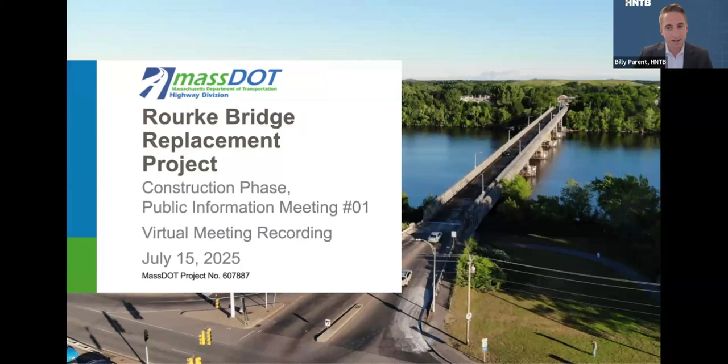So we'll jump right into the agenda. I will be introducing the project team and speaking about the design build project delivery method. Peter Tramontozzi with MassDOT will be providing the project background. Kristen Whitman with Jacobs Engineering, the lead designer on the design build team, will be covering the project design. Andrew Pramberger with Skanska, the firm primarily responsible for construction, will be covering the construction and schedule. Then I will come back to close out with an overview of our public involvement plan and how to stay connected with the project.

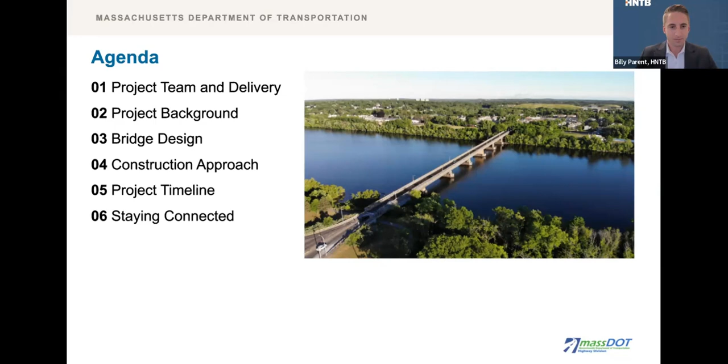To continue with the specific entities and team members, the project was developed and is owned and administered by MassDOT. Mustafa Sadeq is the major projects design build project manager. Peter Tramontozzi, Joseph Stasio, and Daniel Boland help manage project administration, engineering, and construction for MassDOT Highway District 4, which consists of communities within northeastern Massachusetts, including portions of Essex, Middlesex, and Suffolk counties.

For HNTB, as the preliminary designer that developed the base technical concept for the project, Alex Murray is the preliminary design project manager. Graham Gaspar serves as our senior engineer, and Patrick Marvin and myself will be supporting public involvement.

For the design builder, Robert Pine is the vice president of operations, and Andrew Pramberger is the construction project manager, both for Skanska, and Kristen Whitman is the design project manager for Jacobs. Skanska and Jacobs are responsible for finalizing the design to meet the base technical concept and for performing the construction. Jacobs serves as the designer and Skanska oversees and performs construction.

The design builder also has public involvement support, which consists of Regina Villa and Associates, including Regan Checchio, Emily Meyer, Kyle Olsen, and Liam Kearney, to also support public involvement. Finally, I'd also like to mention that the primary municipal coordination for any municipal facilities and utilities will be with the City of Lowell.

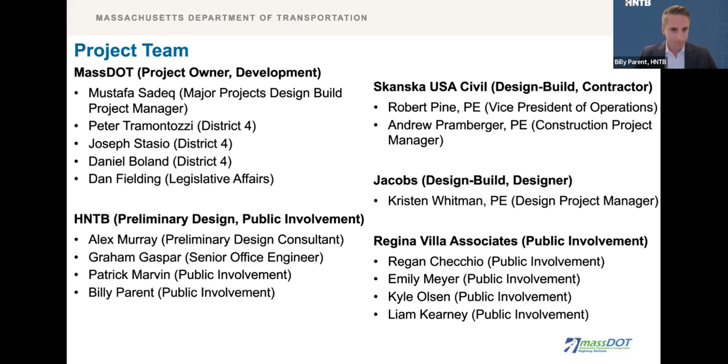Before I turn it over to Peter Tramontozzi with MassDOT, I'll cover a few points about the project delivery. Preliminary bridge design and environmental permitting were completed in the 2023-2024 timeframe.

Additionally, there was a robust public involvement process during the preliminary design phase, which included forming a stakeholder advisory committee and holding multiple public meetings and a design public hearing for design development, all of which took place from 2020 to 2024. At that point, MassDOT advanced the preliminary design and issued a request for proposals for the project to be fully designed and constructed, and Skanska Jacobs was then awarded a competitive best value contract in May of 2025.

This project will be completed using the design build project delivery method, where a single team manages both the final design and construction. This approach combines final design and construction into one phase, eliminating the need for a separate construction bid based on finalized plans and specifications. By streamlining the process, design build can reduce project timelines and foster greater collaboration amongst the project team.

The benefits tend to include that it promotes innovation, reduces the owner's project risk, and expedites project delivery. This delivery method also enables the contractor to begin early construction on some items while final design is still underway.

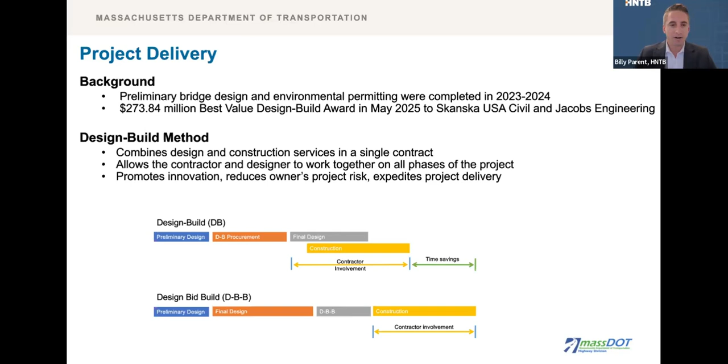So with that, I will turn it over to Peter Tramontozzi with MassDOT to get into the details of the project background. Thank you, Billy, I appreciate it. My name is Peter Tramontozzi. I work out of the District 4 office. The project background, as everyone is aware, is the Rourke Bridge in Lowell.

Many of you are aware this bridge was built in 1983 and was opened to traffic in 1985. It provides a vital connection across the Merrimack River, as there are about 27,000 vehicles per day that use this crossing. As shown on the graphic, the UMass Boathouse is directly downstream of the bridge, and there are many soccer fields, the Esplanade, the parks, and the charter school all within walking distance of the bridge.

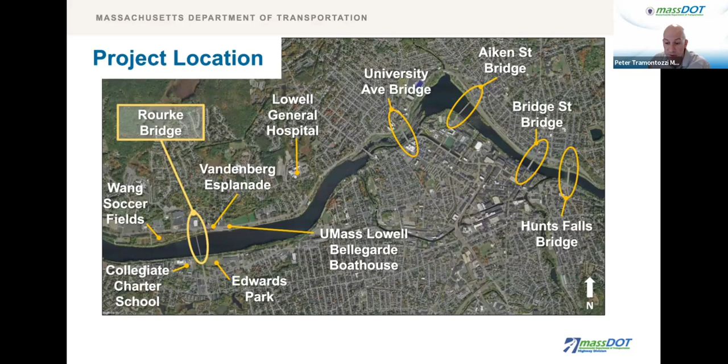Next slide, please. The existing conditions, as I had mentioned, the bridge has been in place since 1985, and while it is safe and inspected regularly, it is towards the end of its useful life.

It does not meet current MassDOT standards, as there are no shoulders or bike lanes, and it can only accommodate one travel lane in each direction. As you can see from the photo, the sidewalk is also outdated and is in much need of an upgrade.

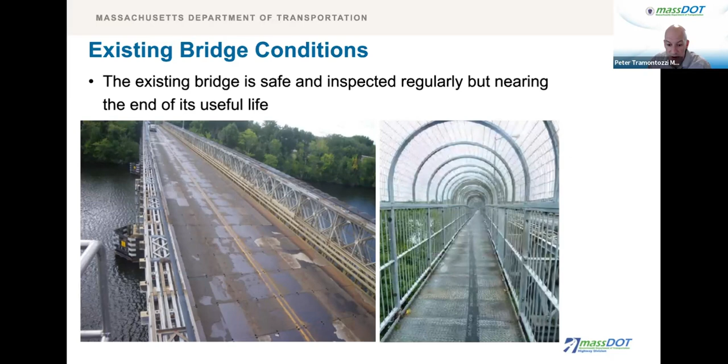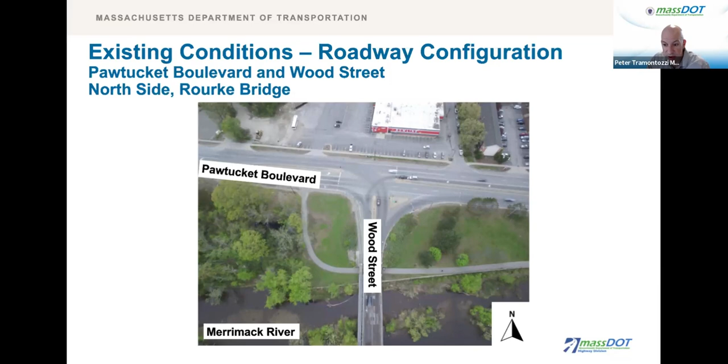Next slide, please. Along the north side of the project, this shows the configuration along Pawtucket Boulevard. As you can see with this slide, there's also inadequate approach capacity on the north side, and there's only one left turning lane from Pawtucket Boulevard westbound onto the bridge. The traffic signal equipment is also outdated and in need of an upgrade. Next slide, please.

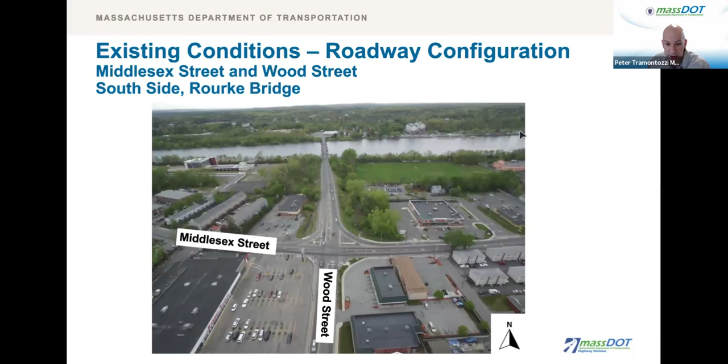When our project team was developing the base technical concept, they needed to make considerations for all the users within the area. This area is not only used by vehicles traveling over the bridge, but pedestrians, bicycles along the waterfront, and rowing within the Merrimack River.

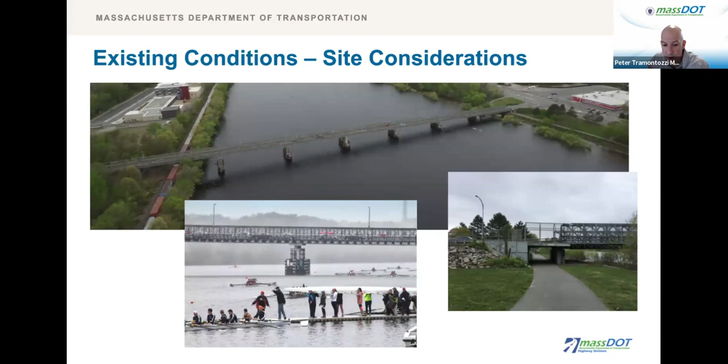The project purpose: with this project, we're going to be replacing the bridge. We're going to be enhancing safety and connectivity for pedestrians, bicycles, emergency vehicles, and watercraft. And we're going to improve traffic operations at the Wood Street intersection with Pawtucket Boulevard, Middlesex Street, and Princeton Street.

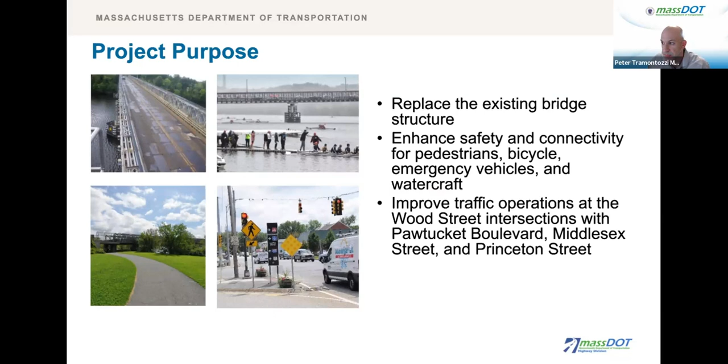So what does that entail? The scope of work for our project is we'll have a new relocated Rourke Bridge, slightly to the west, across the Merrimack River. This includes new abutments, new in-water bridge piers, and significant roadway improvements on the approaches.

We will also have utility and roadway reconstruction along Pawtucket Boulevard and Middlesex Street. There's going to be significant landscaping and hardscape improvements. Then at the end of the project, once the new bridge is open to traffic, we're going to demolish the existing temporary bridge and remove the 1985 structure.

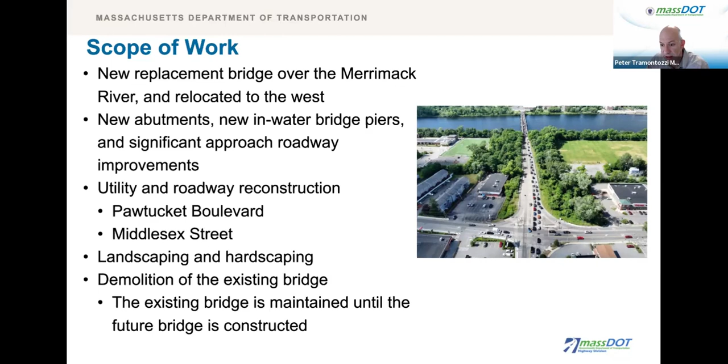This graphic shows the overall general scope of the project. As you can see, the bridge is built slightly to the west, and we have a legend at the bottom of the screen which shows the significant improvements that will be done on this project, which include the roadway reconstruction, the new landscaping that'll be done, the installation of shared use paths and bike lanes on both sides of the bridge and the river, and significant sidewalk and hardscape improvements as well.

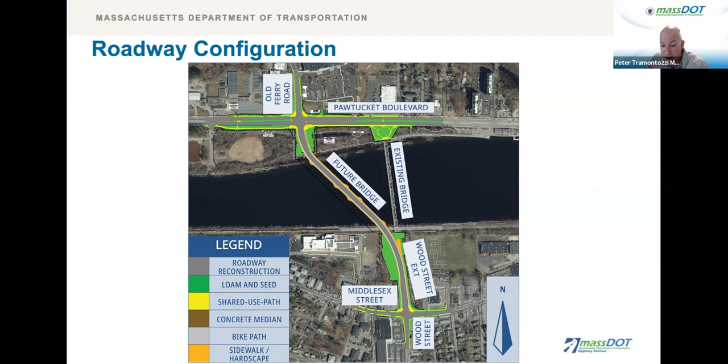And with that, I'll turn it over to our lead designer, Kristen Whitman, who can discuss some of the elements that are highlighted on this screen.

Thanks, Peter. So starting off with the bridge design, this slide shows a cross-section of the new bridge.

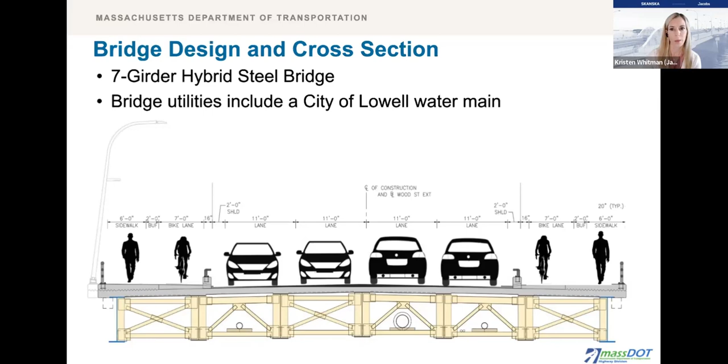It will be 84 feet wide, which is much wider than the existing bridge, with 2 traffic lanes in each direction and sidewalks and bike lanes on each side. The bridge superstructure will be made up of 7 hybrid steel girders and a concrete deck. Utilities carried along the underside include a water main, drainage pipes, and fiber optic conduits.

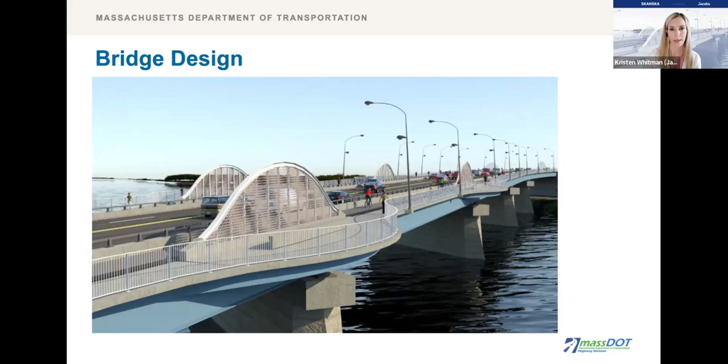The bridge piers will be concrete wall piers with a full height granite facing from the base up to a concrete pier cap. This will provide a clean and simple look at all 6 piers, even though they vary in height from shorter piers at the north end to the taller piers at the south end. The full height granite walls are also consistent with other bridges along the Merrimack River.

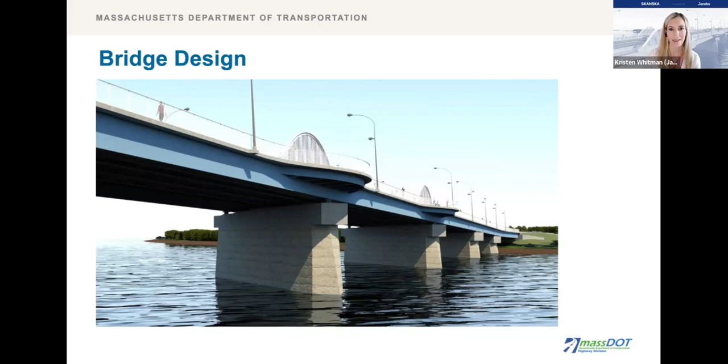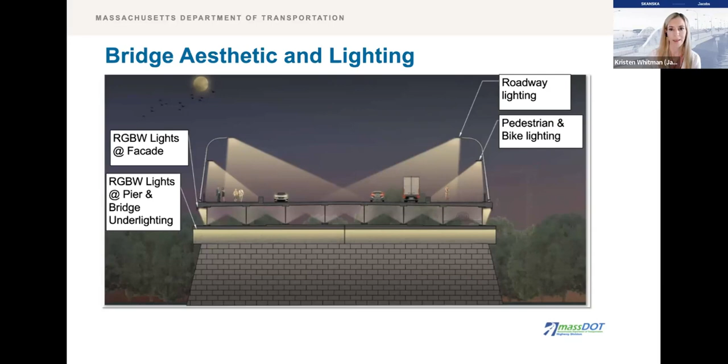Here's a nighttime view showing the roadway lighting, pedestrian and bike lighting, and the aesthetic lighting along the facade, piers, and the underside of the bridge. And on the next slide is an elevation view of the bridge at night, showing the lighting along the trellises and how the trellis layout is inspired by waves.

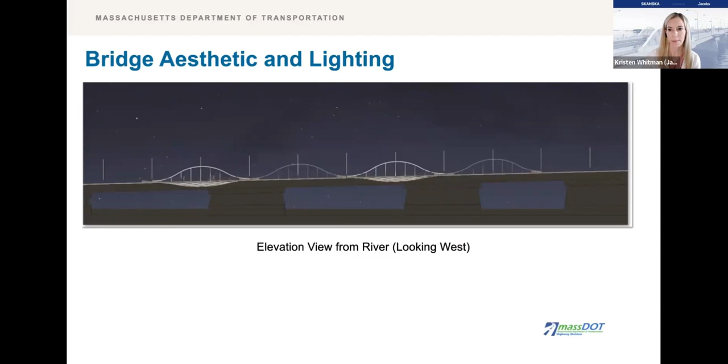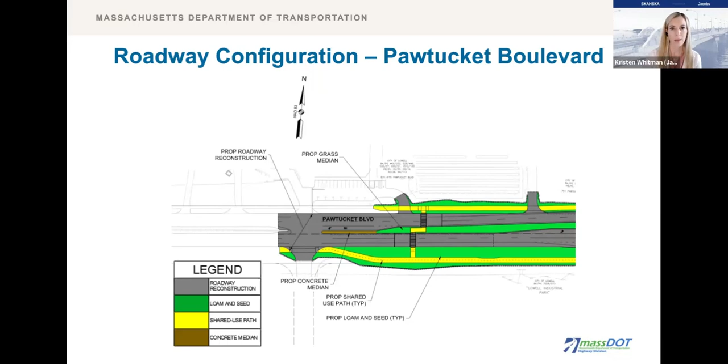Next slide. So here we have a few slides showing the work along the roadways in the project area. This is Pawtucket Boulevard near the west end of the project. We have roadway reconstruction shown in gray, the proposed shared use path in yellow, green for the grass areas, and a new section of concrete median in brown.

Next slide. At the north end of the bridge, the new bridge alignment on Wood Street Extension comes into the intersection of Pawtucket Boulevard and Old Ferry Road. This intersection will be reconstructed for vehicles, bicycles, and pedestrians, with new traffic signals, hardscape areas, and drainage basins.

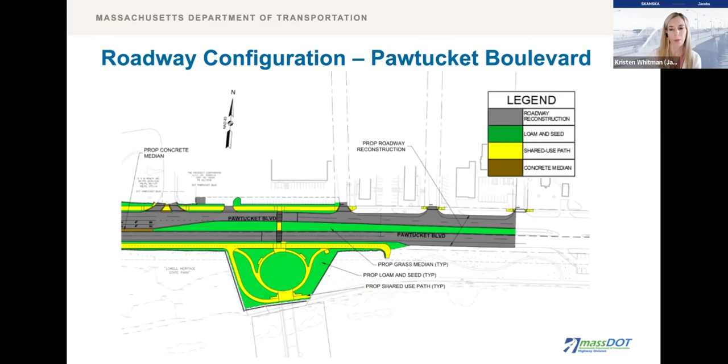Next slide. So where the existing bridge currently intersects with Pawtucket Boulevard, the bridge will be demolished, and that whole area will be converted into an overlook park area with a shared use path, benches, and landscaping. And at the south end of the new bridge, Wood Street Extension will intersect with Middlesex Street.

This intersection will be reconstructed with new traffic signals to accommodate the bicycle and pedestrian movements through the intersection and along the shared use path.

Now I'll pass it over to Andrew to present the construction approach.

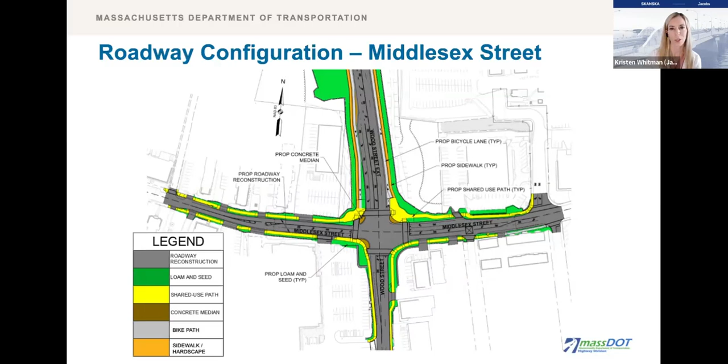Thank you, Kristen. The construction approach relies on maintaining access throughout construction for existing vehicular and pedestrian traffic, to allow local business access and driveways along the corridor.

The new bridge will be constructed offline of the current bridge so that we can then tie the new bridge in and remove the existing bridge in one phase.

Most of the work will occur during daytime hours, though some work will be required at night for utility work or lane closures, so as to minimize traffic disruptions on the local streets.

In terms of construction mitigation, we will have traffic management plans in place to minimize impacts to roadway users and identify the best routes for truck traffic to go when accessing the construction site.

The abutters and the community will be kept informed throughout construction through regular updates from Mass DOT, and major operations will be within confined work zones to separate active construction from the public.

We want to minimize construction vehicles on local streets by using dedicated haul routes and minimizing truck traffic, and schedules will be coordinated with the rowing community as well to minimize impacts to the waterway on the Merrimack River.

Noise and dust control mitigation will include noise monitoring and dust monitoring in process, and we'll utilize water spray to mitigate dust. Work will also be scheduled based on weather and events to minimize overall impact.

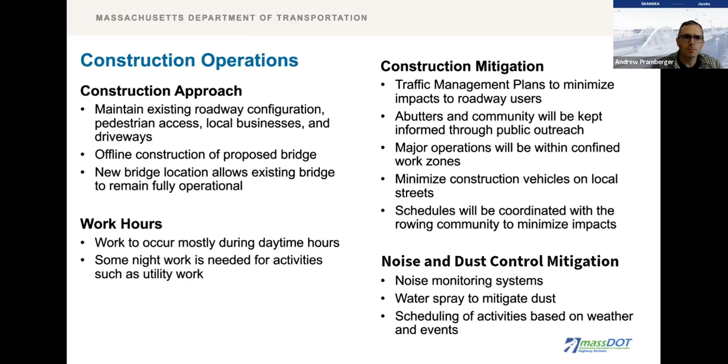In regards to the project schedule, there's an 18-month design phase that is well underway.

Jacobs, working with us, is proceeding with the final design as we start with some early enabling activities. We have investigatory work underway right now to support the design, consisting of geotechnical borings and field investigation that will last through the summer. Starting in August and September of 2025, initial tree and vegetation clearing will begin so that we can set up the work zones.

That will be followed by construction of a temporary access trestle running through fall 2025, followed by the permanent new bridge construction. Full beneficial use of the future Rourke Bridge is anticipated in 2029, and final completion of the project is in 2030.

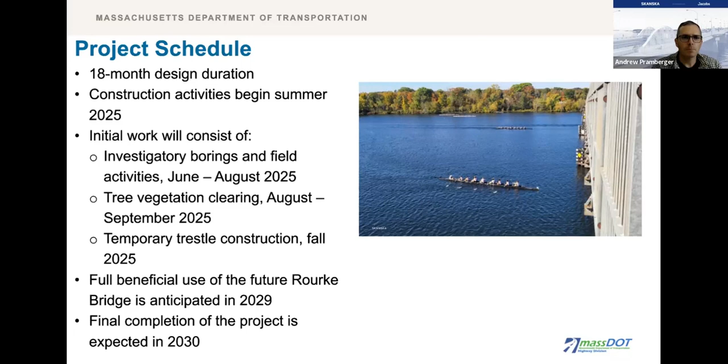Now, to walk through how the bridge will be built, we have a series of 3D renderings. All of these renderings are looking from the north side of the project, looking south. In the bottom right-hand corner you have Pawtucket Boulevard, and on the top left is the existing intersection of Wood Street and Middlesex Street.

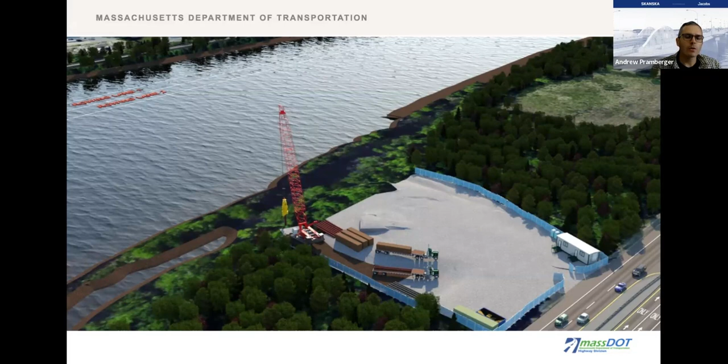Most of the work will be accessed from the north side of the project off of Pawtucket Boulevard. There's an existing area where the new north approach will be, that our construction access yard will be working from. The first step is land clearing, followed by access so we can get out on the water to build the new structure. That requires us to build a temporary access trestle, or a small work platform, extending out into the Merrimack River.

You can see here the trestle construction will proceed from the north abutment work zone, working south on a diagonal basis following the new alignment of the Rourke Bridge. We'll have a crane working its way out to set the new access trestle.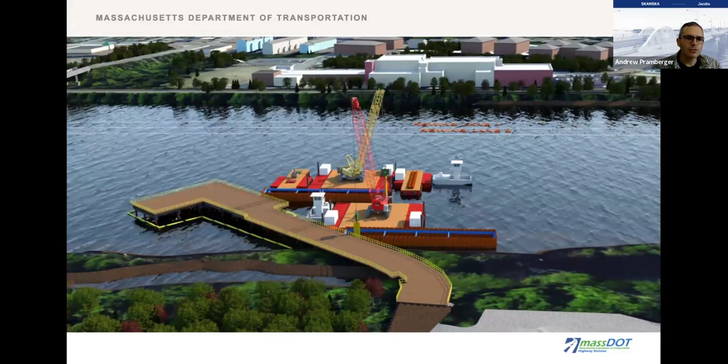Once that access trestle has been installed, that will be our primary access to get machines, equipment, and craft onto the water. So we will not be using the local DCR access ramp further down at the Rourke Brothers boat ramp.

Construction operations start working from the north side to the south at the six bridge pier locations. This consists of driving sheeted cofferdams to create dry work areas to build the bridge piers, followed by the drilled shafts that support the bridge foundations, working our way to the south. In this rendering, you can see a drilled shaft being installed at the closest pier to the north abutment, Pier 6, while the sheeting is being installed at Pier 5, just downriver from that.

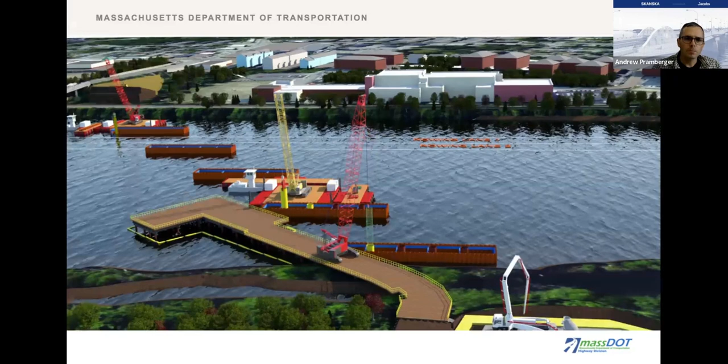So in total, there are six sheeted cofferdams going into the river, all of which will be advanced working from the north to the south.

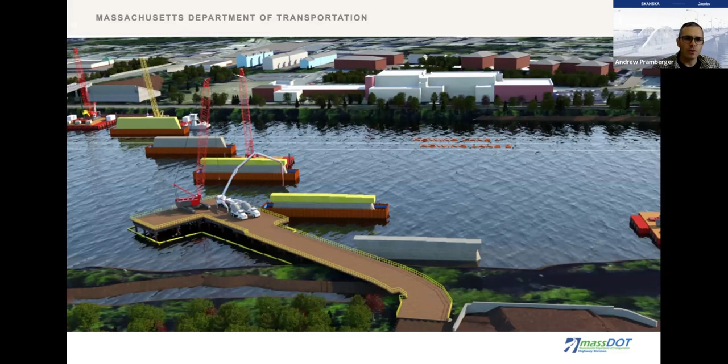Once the sheeted cofferdams are in place and the drilled shafts have been installed, the next step is to install the concrete foundations and piers that support the bridge. These will be installed, again working from the north to the south, with the site accessed from the temporary trestle, as well as barges working on the water.

So we mentioned access for the rowing community. At all times, 2 rowing lanes will be maintained and marked through the Merrimack River for recreational access. We also know that up to 6 rowing lanes and 1 return lane will be required for one of the many regattas that go across the river. In this case, construction operations are designed so barges and equipment can be pulled to the north side as shown here, and the temporary trestle only extends far enough to maintain those 6 lanes plus the return lane. We'll coordinate closely with all rowing activities to ensure those events continue to occur.

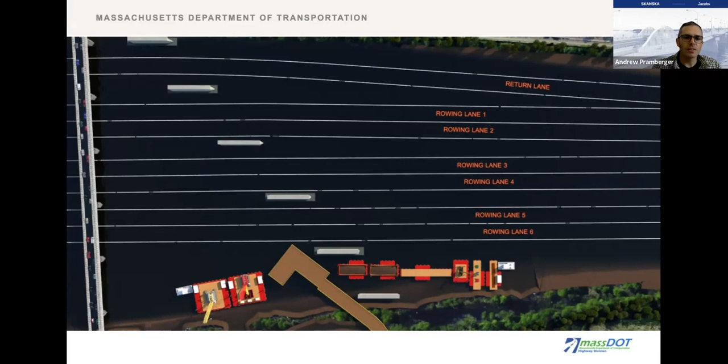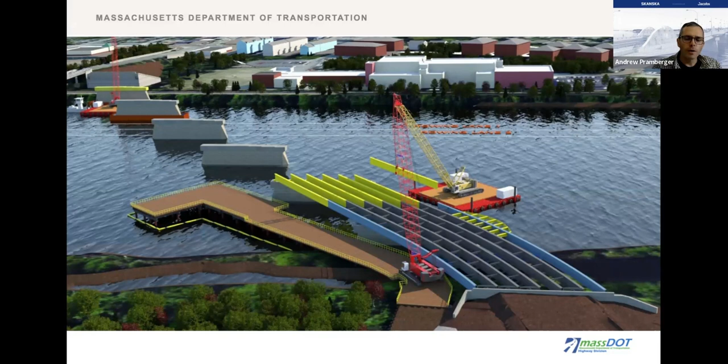Next slide. Once all of the concrete piers have been installed, bridge steel erection will begin, working our way from the north side moving south. Steel girders will be set into place using a series of cranes working down. The next step will be placing the concrete bridge deck. Here you see all of the bridge steel installed, tying into the south abutment.

Followed by the concrete bridge deck being poured out from the north to the south. Once the bridge deck has been poured, we will open the new structure with 1 lane in each direction.

And that allows us to then take out on the south side, where the existing Rourke Bridge is, to build the full width bridge. Here you see the full 4 lanes of traffic in service, along with the new bikeways and pedestrian walkways. Once that full structure is constructed, we will proceed with demolition of the existing Rourke Bridge.

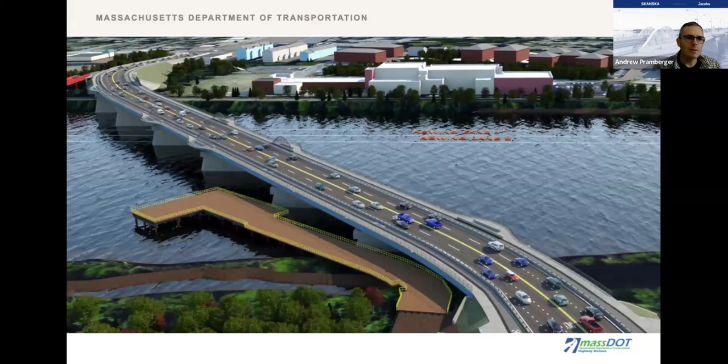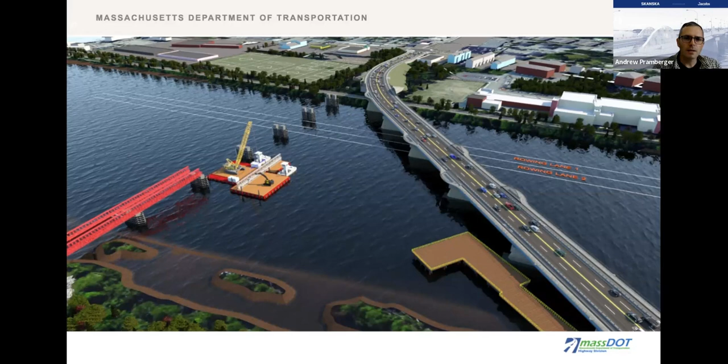As you see here, that work will take place from the south, working north, taking the bridge apart span by span, lifting the structure onto barges, dismantling it, and bringing it to the north to be shipped off site. So that's the full construction sequence, bringing us to the full beneficial use in 2029.

So I'll turn it back over to Billy now to talk about public involvement and keeping everyone informed.

Thanks, Andrew. Public involvement and minimizing impacts during construction are top priorities for the project team. I'll now go over our approach to public involvement, abutter coordination, and review the different methods by which the public can stay connected and informed as the project moves forward. At the outset of the project, we developed a public involvement plan outlining our activities to keep stakeholders updated. We've carried over a list of approximately 1,400 stakeholders from the design phase, which will be a growing list to ensure a comprehensive group of contacts for the various individuals and organizations involved with the project.

We will also be developing a schedule for public meetings, which we expect to host biannually or as needed as the project progresses. Our first public meeting for the construction phase was Tuesday, July 15th, at Collegiate Charter School of Lowell.

Additionally, our plan outlines how we coordinate and notify elected officials through legislative briefings, individual and targeted outreach to abutters and community stakeholders, media and social media engagement, notifications to first responders, and coordination needed with adjacent projects to minimize impacts and coordinate with the Lowell Regional Transit Authority during construction.

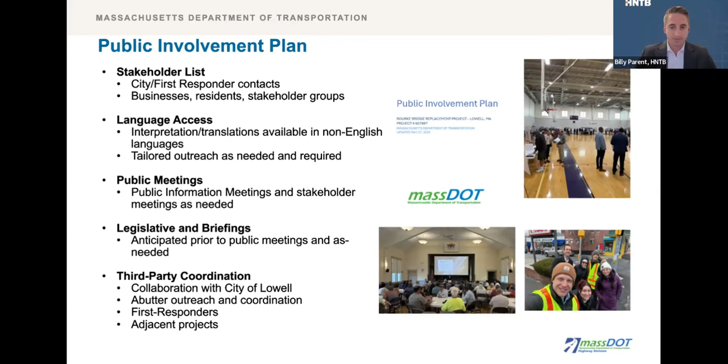Next slide, please. For project communications, there will be multiple ways for the public to reach the project team to provide comments, feedback, or report complaints or issues. The design builder will be establishing a project hotline phone number that reaches the project team directly; this number will be announced shortly after the public meeting.

We also have a live project comment form where anyone can provide feedback that we will monitor and respond to, and a dedicated project email, massdot.rourkebridgeproject@dot.state.ma.us, as an additional method for the public to get in touch with us.

Finally, we are maintaining the existing project website, where we'll provide traffic and construction advisory information, as well as project schedule and milestone updates and materials for public meeting presentations and recordings. We'll also send regular stakeholder email updates and develop flyers for project activities, meetings, and milestones, translated on an as-needed basis, and work with MassDOT Communications on media advisories and social media updates.

So finally, we'd like to thank the Lowell Sun for publishing the public meeting notice in English, Khmer, and Spanish, and MassDOT social media for helping promote the meeting, along with all the collaboration with the City of Lowell that will continue throughout the project. We'd also like to thank all of the various stakeholder groups and organizations in Lowell and Chelmsford who helped us share and distribute meeting flyers and project information in the community.